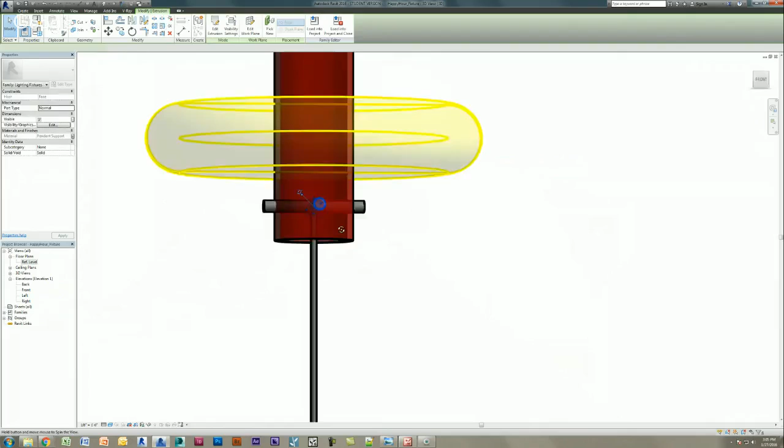It's actually a pretty basic light fixture, but it's also pretty custom. You can see it's got this sort of lampshade. It's got these two supports here. It's a pendant light fixture. It's face-based, and it's fully parametric.

If I go in a project, and I go underneath this little thing, you can see here it is. Here's our light fixture. What we're going to do is we're going to build it completely from scratch, and then we're going to do a quick rendering while we chit-chat on Google Hangouts.

And again, this is fully parametric, so if I went in here, I could change all these settings. This project happens to be in meters, which is going to drive my mind crazy, even though I like meters. But you can see all of these things will change. So if we want to change the thickness from 0.01 to 0.02, click Apply. You can see it got thicker.

If we want to change the pendant length, I think I might have made that an instance parameter right there, pendant length. If I go to 1.5 and click Apply, you can see it gets deeper. So once you take the time to model this, which doesn't take as long as you might think, you can actually use it in all kinds of different locations, etc.

Then we just check the questions real quick. I want to make sure I'm not missing anything. Looks good. Wow, that's trippy, huh? When that thing opens and just keeps going. Look at that. It's pretty cool.

Okay, so we are going to start from scratch. This is the family, and you'll notice there's this funky piece behind it, which is just an extrusion. It's a face-based family. And so you might be thinking, why would I not use a ceiling-based family? Well, one of the main reasons I don't like to use ceiling-based families, especially when it comes to light fixtures, is when you're linking projects. Sometimes, if not all the time, it doesn't see the ceiling and it doesn't work the way you want. So when you have a face-based family, you have a lot more options as far as placing the family.

So how do you make a light fixture with a face-based family? Well, if I go to File, New, Family, and I go down to Light Fixtures, you'll notice there's only wall-based, ceiling-based, or just a light fixture. That kind of sucks, right? Well, all you got to do is start with a generic model face-based. So I just started with a generic model face-based. Let me go in 3D so you can see it. I have to go shaded, especially with light fixtures.

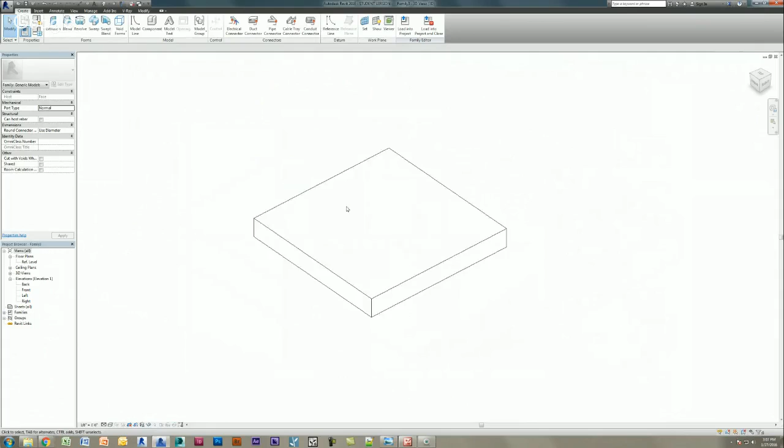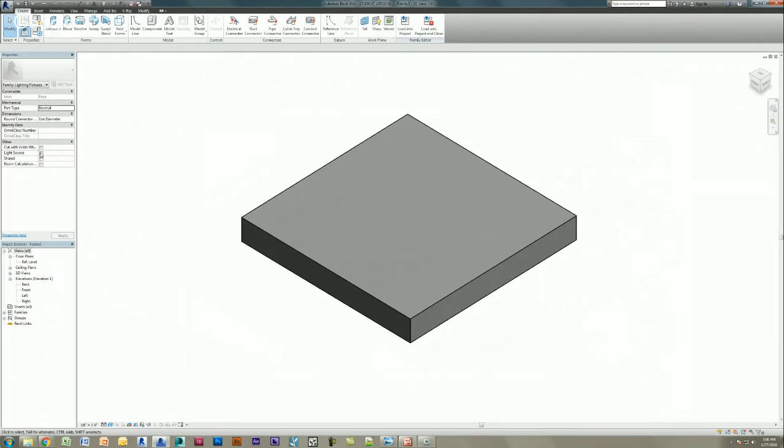We have our generic model face-based, and all you have to do is change the category. So if I go up on the top left where it says categories, I can change this to light fixtures. What it's going to do is it's actually going to give you a couple more options as far as connectors and line types, but it also gives this nice little checkbox here for light source. So if I check that off and click apply, now we have a face-based family that has your light source, right? And that's all you need for a light fixture is a light source.

So let me save this before I forget. Happy hour, final light. You can see I did it before just to make sure. Save. Okay, so there we go. Pretty simple, right?

Let me just check the questions. Very cool. All right. I wish there was like a notification or something. That's all right.

So first thing we want to do is we're going to do most of this in the elevation view. And the reason being is I'm going to actually use a bunch of revolves. Now, there's other ways you could do it. And as I'm doing it, you might be saying, oh, well, I could use an extrusion instead of revolve here. It's possible, but I'm going to sort of show you why I think the revolve is a good tool here. So we're going to go into our front elevation. But before we do that, we want to change this. This is a linear light source, right?

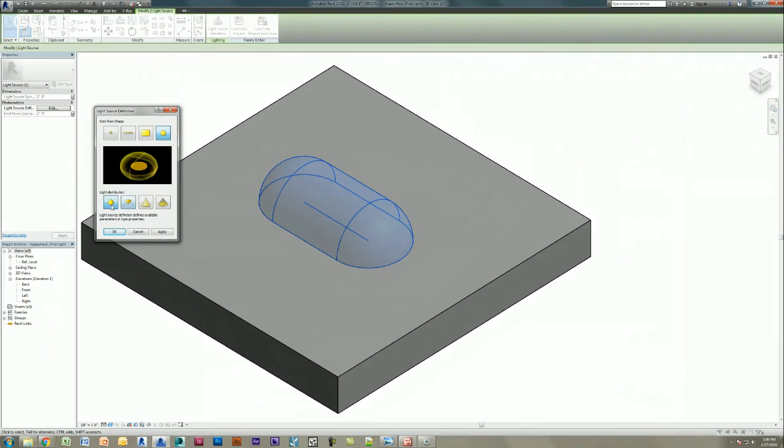And if you saw from that fixture before, if I go back into our final fixture, you can see it's not linear, right? That's not a linear light source. It's round. So we're just going to change the shape of our light source right off the bat so we don't forget. I'm going to select my light source. I'm going to say light source definition, and I'm going to go with round or circle. And then I also want it to be a sphere. I guess you could go down if you want, but this is kind of a neat light because it can shine up and down a little bit if you'd like. And click apply. And there we go.

It's pretty big right now. We're going to change the size of it later. And now we're going to go to our front elevation. We're going to work in our front elevation quite a bit in this family. So I'm going to type SD on my keyboard so we have a nice shaded view.

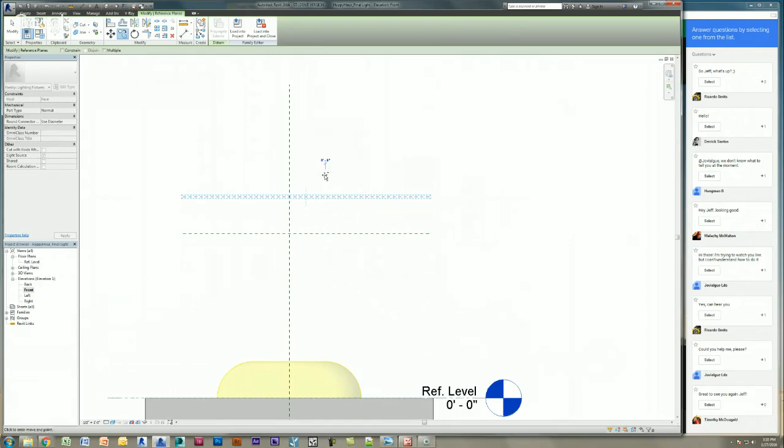Now we're going to draw a few more reference planes. We want to draw the actual depth of our pendant. And we also want to draw a centerpiece where that light fixture is going to go. So I'm just going to copy this up. I'm going to type 1 foot, and I'm going to copy it again, and I'm going to type 1 foot. For now, we can change that at any time. So now we have 3 reference planes, and we've got our light source down here.

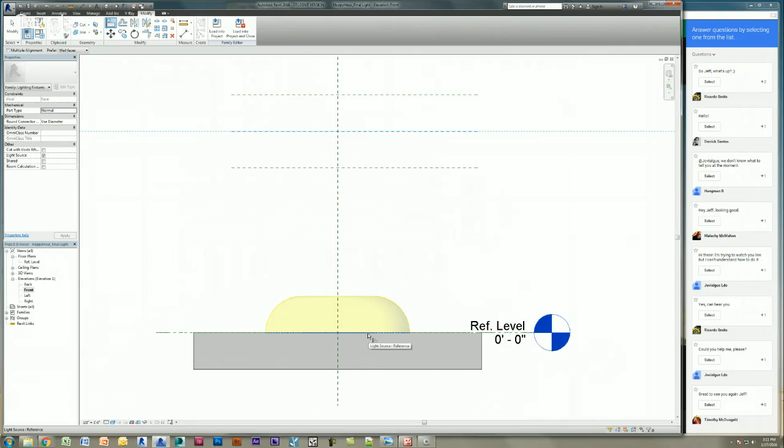So the first thing I want to do is I want to move this light source up to there and get it out of the way. So I'm going to type AL on my keyboard, my reference plane, and then I'm going to go down here, and I'm going to tab until I hit the light source. So there it goes. It says light source reference. So I'm going to click that, and I'm going to lock it. So now it's locked to this reference plane. So wherever this reference plane goes, that light source moves.

Great. So now we're just going to apply a couple parameters to this before we start getting anything detailed. So I'm going to type DI on my keyboard. I'm actually going to tab, and I'm going to dimension the reference plane down here. So there we go. I'm going to dimension the reference plane, and then I'm going to dimension this first reference plane, which is the top of our pendant. We're also working upside down. If I go back here, it might be a little confusing.

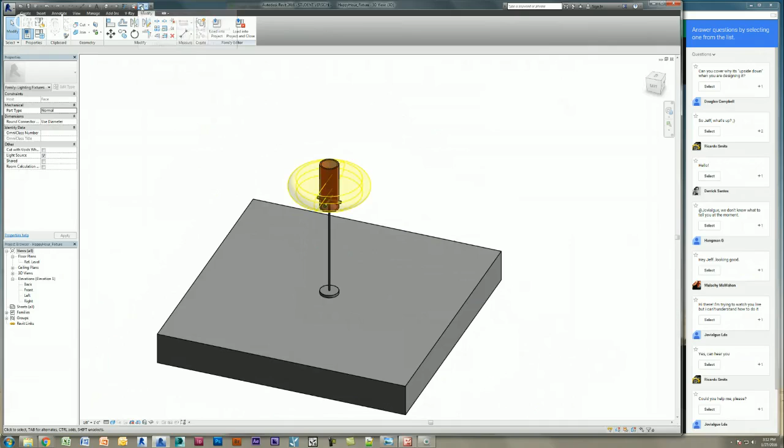Oh, look at that. And Doug just asked. Thanks, Doug. So the reason I'm working upside down is because it's face-based, and that's just how the template's set up. I guess you could reverse it if you want, but it takes a little bit of a mind jump to realize that. But if I go into the final one, you'll see what I mean. Let me go to the final one. So the face base starts with an extrusion that represents your face. So when you bring it into a project, it can technically be any direction.

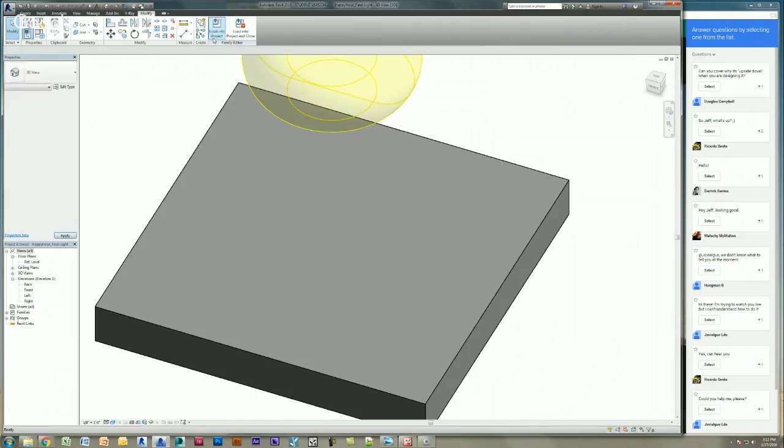So if I went in here and I said architecture component, here's that family I created. If you can see, it's actually looking all over the place, and it's turning left and right and up and down. So it really doesn't have a top or bottom or up and down. And so the default template has your face on the bottom. So you got to kind of do it in reverse. So again, if I went to the original one, you'd see. I should have named these something different, huh?

There we go. So if I went here, you could see. So now we're upside down. But you get the idea. Once you understand that, it's not that difficult to build it the same way. Again, it's just because this now can go in really any direction, which is pretty cool, right? So let's go back here. And there we go. We've got our upside down light. Okay. So I'm going to add a parameter to this. So I just selected the dimension, click add parameter, and I'm going to name this pendant length.

And I'm going to keep it a type parameter. I think I made it an instance parameter before, because you may want to push and pull it sometimes in elevation, but we're going to make it all types for now for this particular parameter. Now I also want to click dimension, DI on my keyboard. I'm going to select these two reference planes, and I'm also going to select these two reference planes. So I hit a string of dimensions between these three, and then I'm going to do an overall dimension.

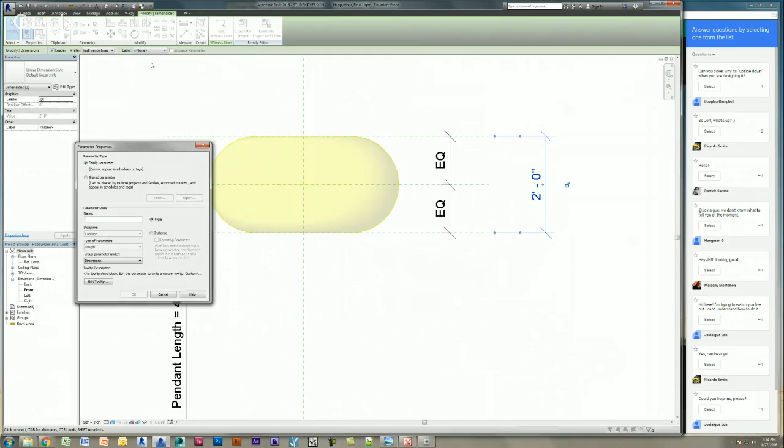So what that's going to do is if I select this string and click EQ, it's going to keep my light source in the center of whatever depth this is. So if I select the 2 feet dimension, click add parameter, and I call it fixture height. Now, whatever I do with this fixture height, so if I take this and I pull it up, you'll see this light fixture or light source actually stays centered. So that's why we EQ it. So now no matter what you do with this, it's going to stay centered.

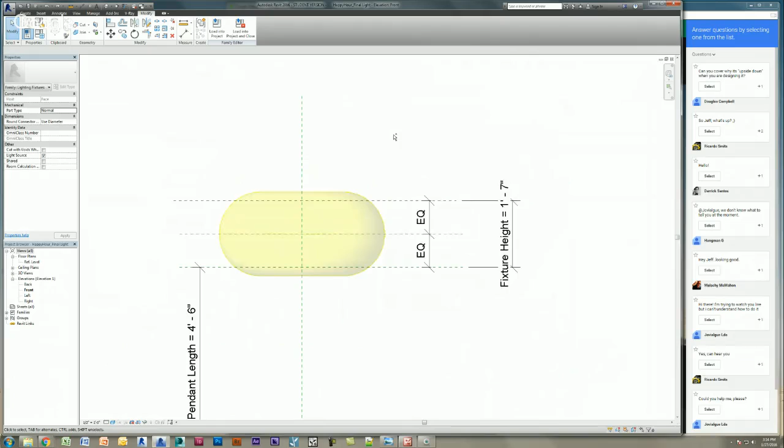I'm going to do this back to 2 feet. Okay. So there we go. I'm going to save that before it explodes. Now there's a couple more reference planes that we're going to put, and they might not make sense until we draw geometry. So I'm going to take this bottom reference plane. I'm going to tab to it. I'm going to copy it up. I'm just going to go 3 inches. It's kind of arbitrary right now, but what that's going to be is those supports.

I'm also going to dimension that. I'm going to add a parameter, and I'm going to call them shade supports. I guess we could say shade support location or something, but that's okay. So the shade support. So now whatever this does, you can see the shade support is actually moving with it. We don't want that, right? We want that shade support to stay at the 3 inches. So I'm going to make sure I lock it.

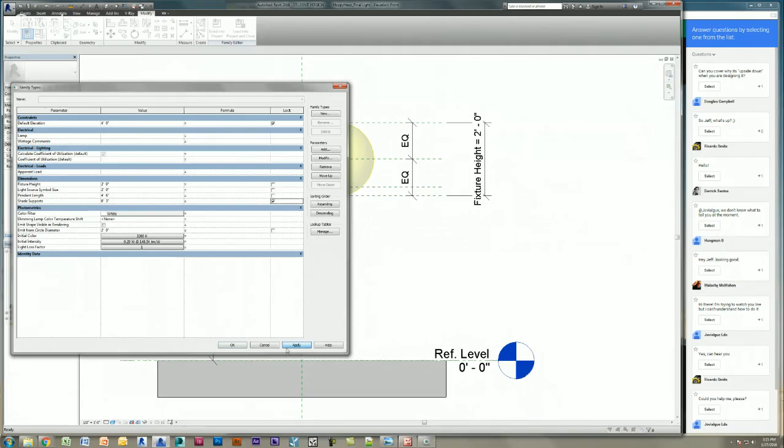So if I go to my family types, and this is why you flex families. I mean, no matter what, when you're building them, always keep flexing your families. So shade supports, I'm going to click lock there. And I'm also going to do it for fixture height, just for right now. And so now if I take this reference plane, I push and pull it, you're going to see everything's moving along with it. So this is why you want to flex.

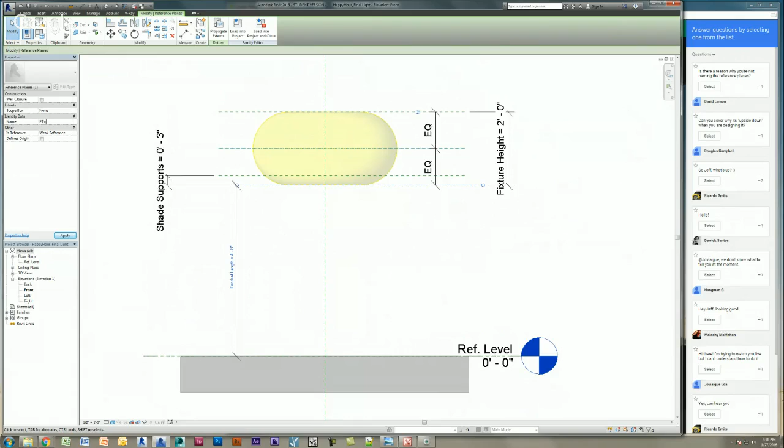David Larson asks, is there a reason why I'm not naming reference planes? That's a great question, and it's because I'm lazy. You can name reference planes all you want. So you can select this, and right under here say name, and you can say pendant, top of pendant, or something like that. Honestly, when you build a bazillion of these and you start using so many reference planes, it can get very time consuming to do it. I know a lot of people say it's a best practice to do it.

So I guess you can name them if you'd like. So that's as simple as it is. You just select your reference planes and you name them as you go along. Unless you want to sit here and watch me name all these, I'm not going to, but that's a very good point. And then Steve Hickerson asked, are these all instances or types? I'm using all instances here. I'm using all types here.

This is a type of family where I think you would want to have 8-inch diameter and be able to control all of that as a type parameter. I don't think there's going to be enough variation in this to not. I'd say the only parameter I would make an instance if you wanted to would be this pendant length. And the reason being, if you're on, let's say, a sloped roof or something, you might have the exact same fixture that's going to have multiple lengths, right? Because it wants to be even or something like that.

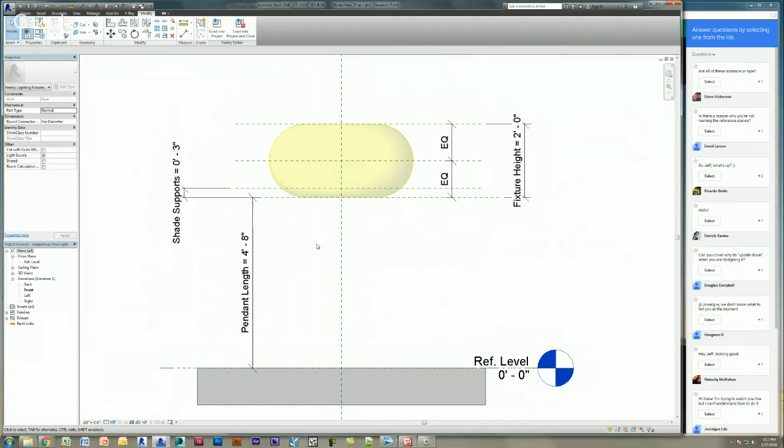So right now, these are all instances. Sorry, these are all types. I guess I'll make this an instance just for the point I just made. So pendant length, I'll modify it, and I'll make it an instance. And again, the reason being, if you place it on something on an angle, and maybe we'll do it at the end, you can make the bottom of it all the same.

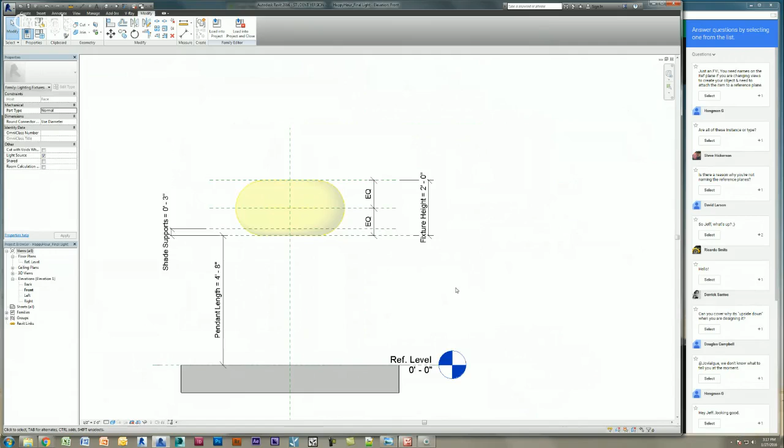Okay, so Hangman makes a good point as to naming reference planes. He's saying that when you're locking stuff and you need to attach to reference planes, it's nice to name them, because when you're in different views you'll see the name and you know you're locking to the right one. So that's a good point. None of these reference planes are going to be overlapping that much to where I'm going to get confused or you'll get confused. So I'm still kind of doing it for the sake of time.

Okay, great. So now we're going to set up a few more reference planes. And this is where people might scream and say, why are you doing it this way? But I actually kind of like doing it this way. I'm going to use a revolve instead of an extrusion for this, and I'll explain why. So first, we're going to draw a couple reference planes vertically. I'm going to draw a reference plane here, select it, and say 3 inches.

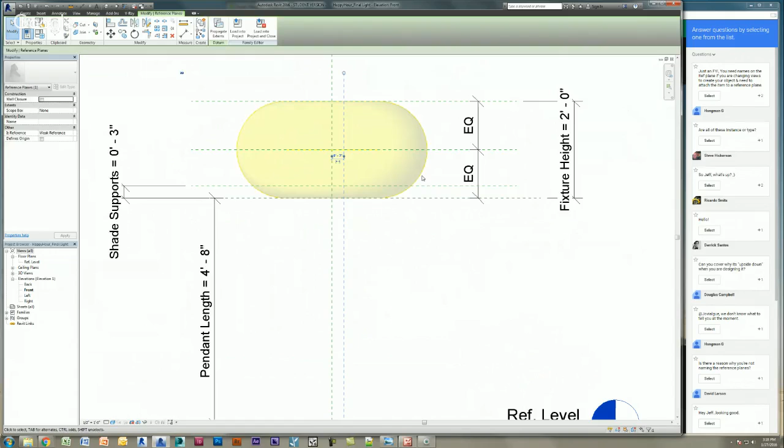And I'm going to draw another reference plane. I guess I could just copy this one. We'll copy this one. I'm going to go out 1/2 of an inch. Okay. So we're starting to set the skeleton for this pendant here. And we're going to draw one more. We'll do that in plan. So we'll just do this pendant first. So we got these 2 reference planes here.

And so now I'm going to dimension these. I'm just going to do it down here so it's out of the way. And I'm going to make 2 separate dimensions because these are going to be 2 separate parameters. If you did a string, you wouldn't be able to do the 2 separate parameters. So if I select this 3-inch dimension and say add parameter, I'm going to call this one shade radius. Type. And I'm going to select my 1/2 inch. Because these are 2 separate dimensions, we don't want to do a string. That's why I drew 2 dimensions.

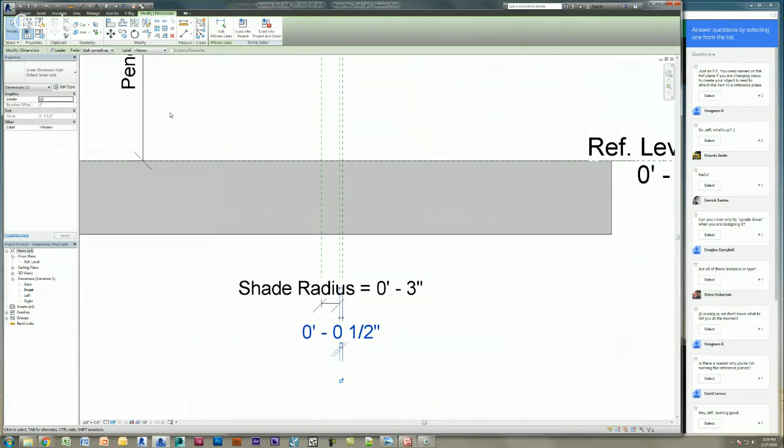And before I do that, I'm going to type UN on my keyboard, and get rid of those damn trailing zeros. There we go. Wonderful. Okay. So let me select the 1/2 inch again, go to add parameter, say type, and then we're going to say shade thickness.

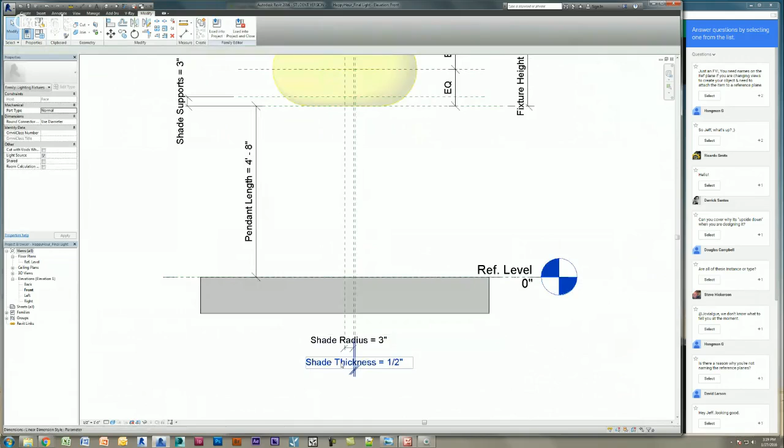Okay. So the reason I'm using a revolve here instead of an extrusion is we can control these with typical regular dimensions. If we were to do it as an extrusion in floor plan, and maybe I'll do it both ways real quick, you would have to use a radius dimension here, and then a radius here, and if you want to be able to type 1/2 inch, you'd have to do a formula or something to make it work. So here it's pretty simple. It's 1/2 inch, 3 inch, and it's going to work the exact same. There's plenty of ways to skin a cat in Revit.

So I'm actually going to create my first piece of geometry now. So I'm going to say create, and do a revolve. And I'm going to first draw my axis line. With my axis line, I'm going to pick lines, and select lock here, because I want this to always stay locked to this center reference plane. And then I just pick the center reference plane.

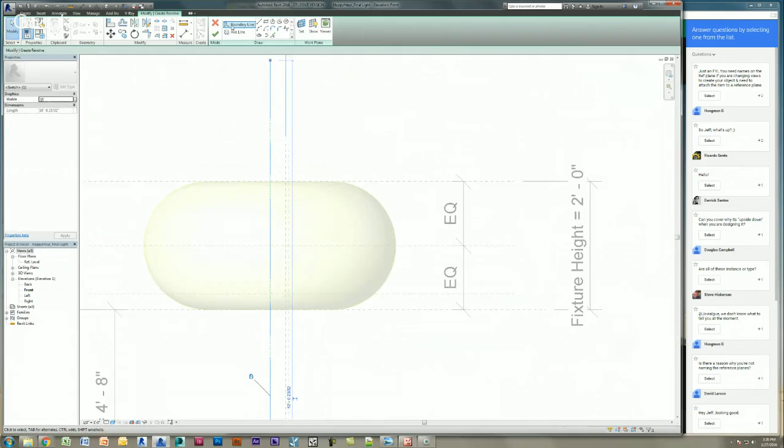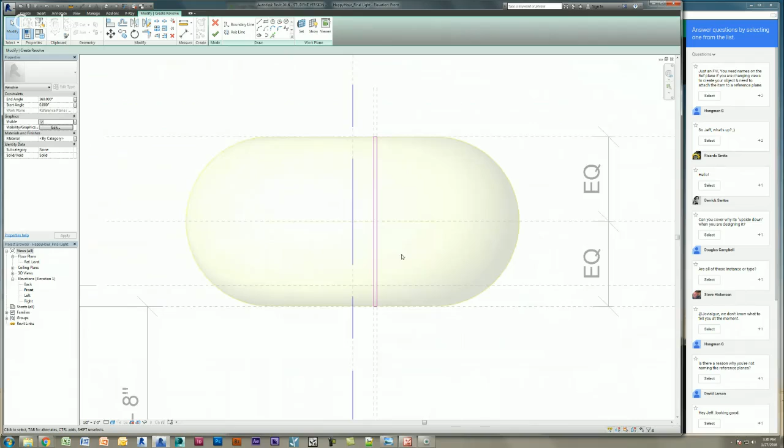And now I'm going to select boundary lines. I'm going to use a rectangle to save some time. And when I draw my rectangle between these reference planes, I'm just going to lock them up. The reason I use a rectangle is because the locks pop up. If I was to draw lines, the locks don't always automatically pop up where you want them to be, right? So you'd have to do it in between and you break your chain. But there we go. So this is actually going to be our shade. We're revolving it around this center line.

So if I click finish, you can see in 3D here, we have a revolve. And because we set up those reference planes already, if I go back to my front view, we set up these reference planes and these dimensions. If I was to push and pull this, so if I said my shade radius was 4 inches, apply, you can see it bumps out to 4 inches. And we can go back down to 3 inches, it bumps to 3 inches. So again, we could have done an extrusion.

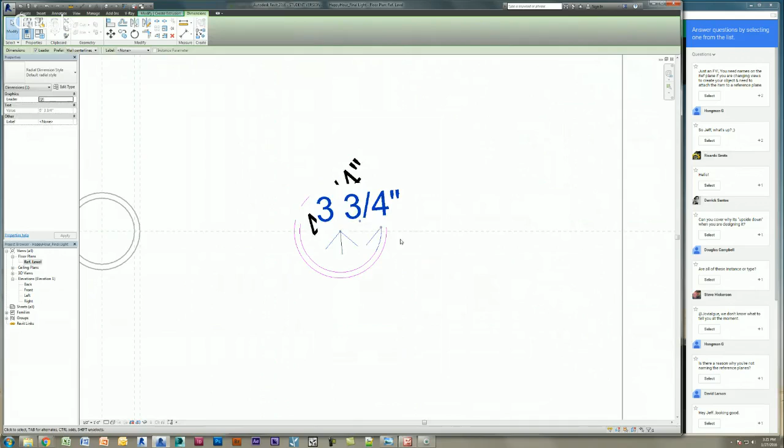So if I go into my reference level, if you did an extrusion, I'll just quickly draw one, you would have to draw 2 circles, let's say, and do 1/2 inch. And then here we dimension a radius to the outside and to the inside. And then one of these would control. So let's say this was shade radius. Now this one, if we said 1/2 inch, shade thickness, obviously it wouldn't work, right? It would have to be shade radius minus shade thickness, and then it would have to be controlled by another one. Excuse me.

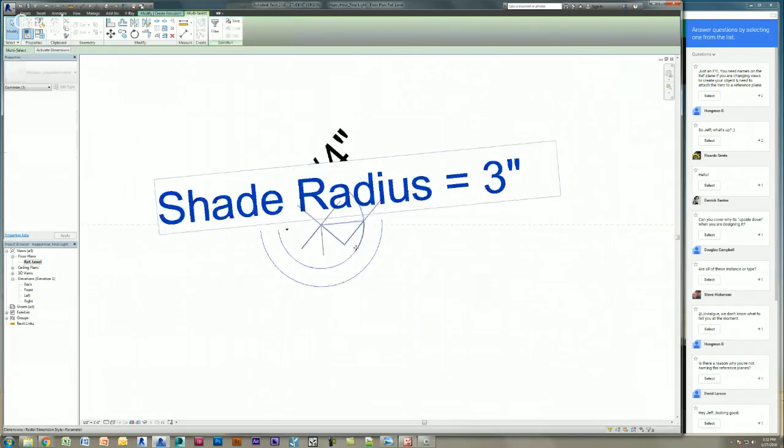So that's the reason why I decided to do an extrusion here, because now we're not using any radial dimensions. I always like to avoid radial dimensions as much as possible. That's just me. You can feel free to use them all you want. Okay, so there we go.

We've got that. Now what we want to do is we need a reference plane for our cable. I feel like we should use the same reference planes for our support. I think maybe you'd want them to be separate. You want the support to stay the same while the shade bumps out. I think it would make sense if this went to like 7 inches or 8 inches in radius. Maybe the support wants to go to 7 or 8 inches in radius. So I'm going to use the same one for now, which is fine.

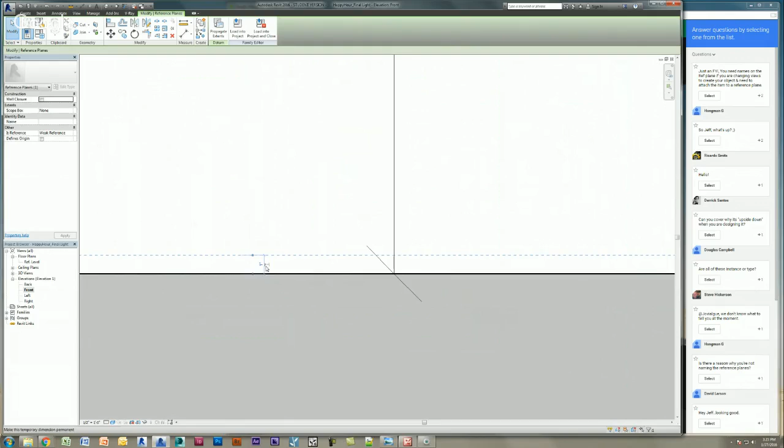And if we want, we can use a revolve real quick to create that. So I'm going to draw a reference plane, and I'm going to set this dimension to, no, let's do 1 inch. Let's do 1 inch there. Okay. Now, instead of dimensioning it, I could bring out this temporary dimension. If you select the little teeny dimension you might be able to see there, it'll turn it into a real one. And then we can convert that, or use DI on the keyboard, or dimension it by hand. I just wanted to show you that little tip.

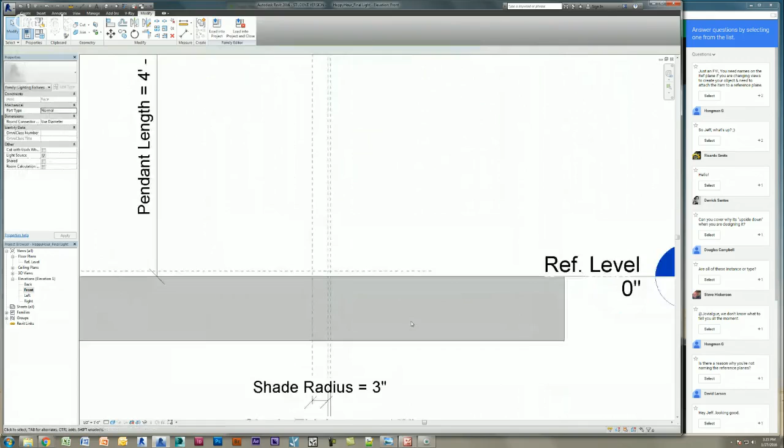So I'm going to select this and say add parameter. Again, I'm going to use a type parameter, and I'm going to say support depth. Yeah, there we go, support depth. Now I'm going to use revolve again, just because I'm in the mood to use revolves. I'm going to say axis line, select the middle, same as I did before, make sure the lock is checked on the axis command. Lock it up there. Then I'm going to select boundary line, rectangle, and do the exact same thing. So pop it from here to here.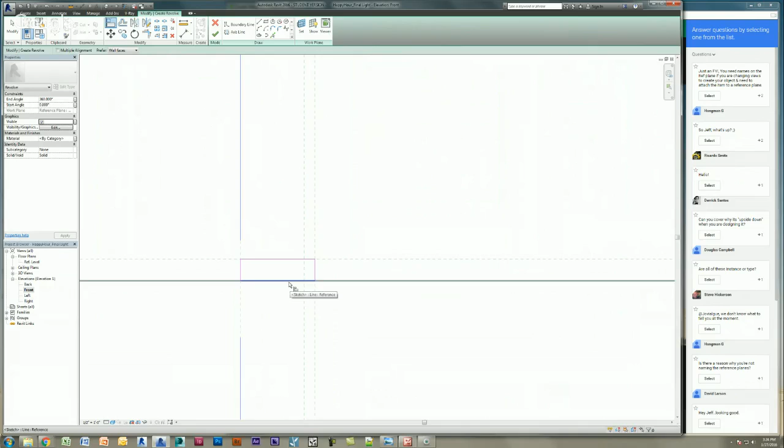The only thing I would worry about here is it might automatically be selecting the reference plane or the face. So I'm not going to use that lock. I'm going to select these three, use align on the keyboard, and tab around. And this is what that comment was before, I forgot who made it. If you tab to a reference plane that's named, it'll tell you right here which reference plane you're tabbing to. This is unnamed, obviously, but I know it's a reference plane. It's the only one there, so I'm going to select it. Then I'm going to select my sketch and lock it. So there I'm actually locking to the reference plane. Then I'm going to click Finish.

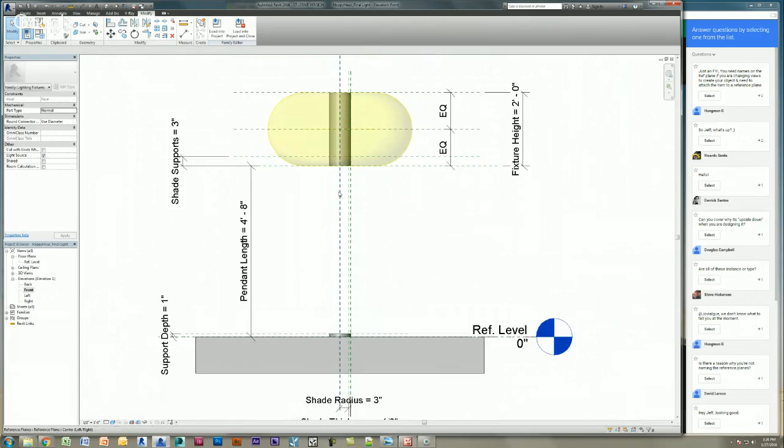Now we have our support. And again, it's controlled by this shade radius. So if I zoom out, there you go, you've got your support there. I guess here we could have done an extrusion just to the shade radius because there's no offset, but again, I'm in the mood for revolves, apparently. So now we're going to draw a reference plane that's going to represent our thickness, our cable. I just drew a reference plane there. The cable wants to be 1/2 inch total, so it's going to be a 1/4 inch radius. I'm going to do the same thing here.

You know what? Because I did so many revolves, let's do an extrusion for fun. So I'm going to delete that. We're going to go back to the floor plan and do an extrusion. I'm going to go to Create Extrusion. I'm not even going to bother with the reference plane because I'm going to keep it centered. So we're going to use a circle, keep it right in the middle, and go out 1/4 inch. So there we go. We've got our 1/4 inch.

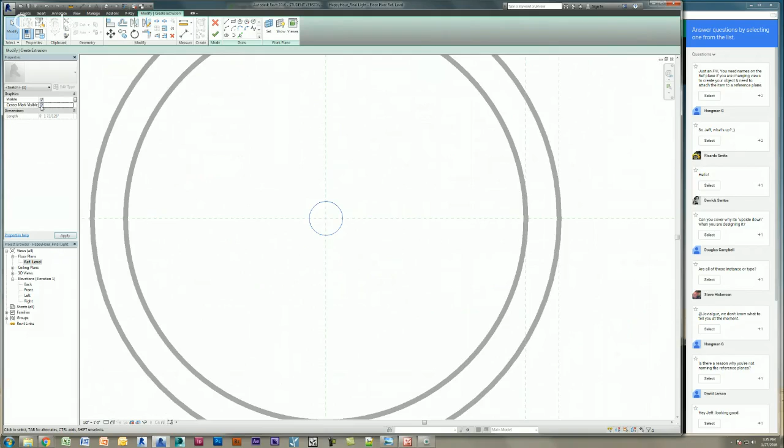Now, usually the automatic sketch dimensions will keep this circle locked to the center here, but I always like to make sure. In order to do that, I select my circle, check the little box here that says Center Mark Visible, and click Apply. What that does is it gives you that X, which you probably haven't seen very often.

And now you can actually align. So if I type AL on my keyboard, I can align to this reference plane and lock it. I can select this reference plane and lock it. And now you know that thing is not going anywhere.

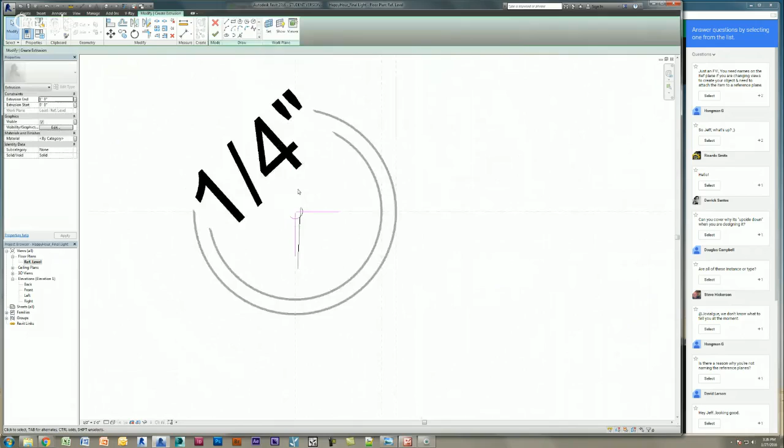Now, last thing we're going to do is we're going to put a radius dimension in here. So here we go. I got a radius dimension of 1/4 inch. And I'm going to select that dimension and give it a parameter. We're going to say cable thickness, or maybe we'll say cable radius so we know it's a radius. There we go, and click Finish.

Now I'll go back to my front view, and I'm just going to pull this cable, and I'm going to pull it up to where the supports are because that's where it's going to support it, and lock it. And I'm also going to pull it back to this reference plane, and I'm going to lock it to that reference plane. So by taking those pulls and moving them around, it allows you to lock to specific elements, which is pretty neat.

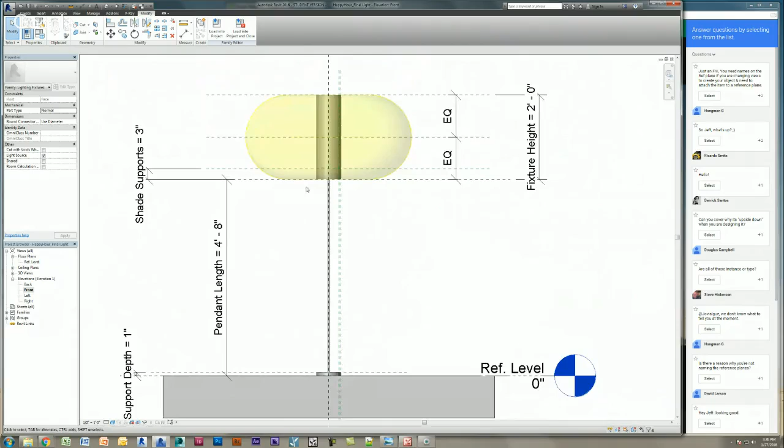So now you can see we're starting to get a light fixture going here. So we pretty much got it there except for the supports and some materials, right? And there's a couple little things that we're going to tweak later. So now we want to go and we want to make those supports, which is just a simple little X, right? They're a cross right in the middle here.

So I'm going to set up some reference planes in floor plan because they're actually going to extend past our pendant a little bit. So if I go into my reference level, which is the floor plan, I'm going to set up a couple things here. Let me type RP on my keyboard for reference plane. Or you know what? I want to go 1.5 inches outside.

So I'm going to start with this one. I'm going to select this reference plane. I'm going to copy it 1.5 inches. Okay. Then I'm going to select it. I'm going to type MM on my keyboard. I'm going to mirror it around.

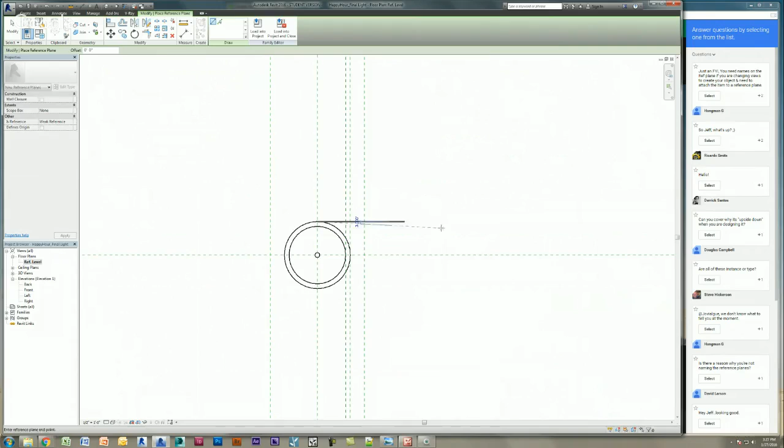I'm going to do the same thing here. I'm just going to draw a reference plane. So we'll extend that up. I'm going to move it up 1.5 inches so I know it's the same as the other one. Then I'm going to type MM on my keyboard, and I'm going to mirror it around. So now we've got this box that we created here. Let me just double check to make sure this question stuff is still good to go. Okay.

So now we have this box here. So now we want this box to obviously be centered within our fixture. So we're going to dimension and make those EQs that we showed before. We're going to constrain it equal. So there we go. I'm going to EQ that. I'm going to EQ this.

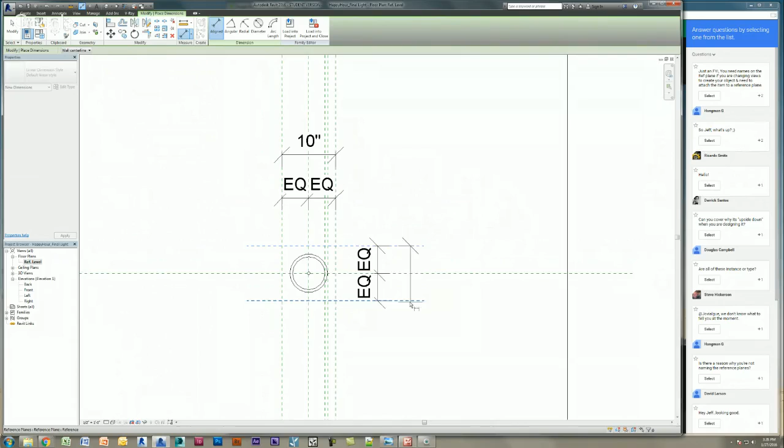Now I'm going to use a dimension for the overall. And we're actually going to drive this dimension with a formula. You don't have to. There's other ways we could have done this. You know, we could just lock it to some other things here. But I think it's going to be a lot easier because we use that revolve technique to use a formula. And then you don't have to think about it later. And I also want to talk about some formulas here, so it's a good opportunity.

So I'm going to select this 10-inch dimension. I'm going to click Add Parameters. And I'm going to call this Shade Support Length. I guess it's kind of long, but let's keep it like that, only because I did it in the example and I don't want to confuse myself. So there we go, Shade Support Length. Okay, so now we have to draw our shade supports, and then we have to set up some math.

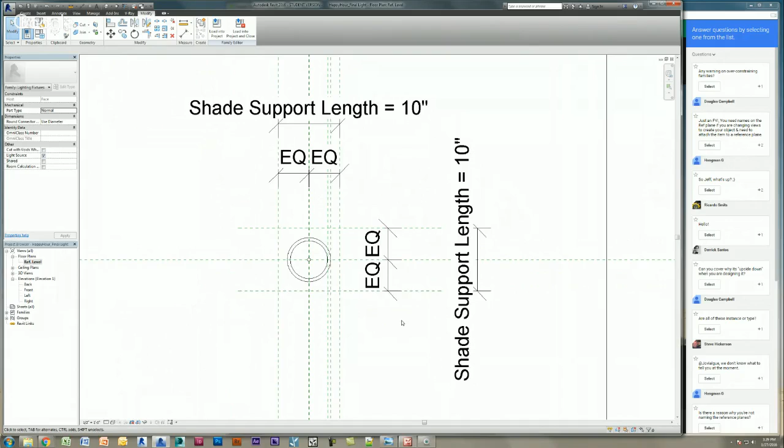So, for instance, if I was to dimension these two on this side and not even realize it, and then try and lock it, look what happens. Yeah, that's right. I forced that error. So that seems to be the typical, and you don't even realize you're doing it, is when you double constrain something. You know, the same will happen in this direction.

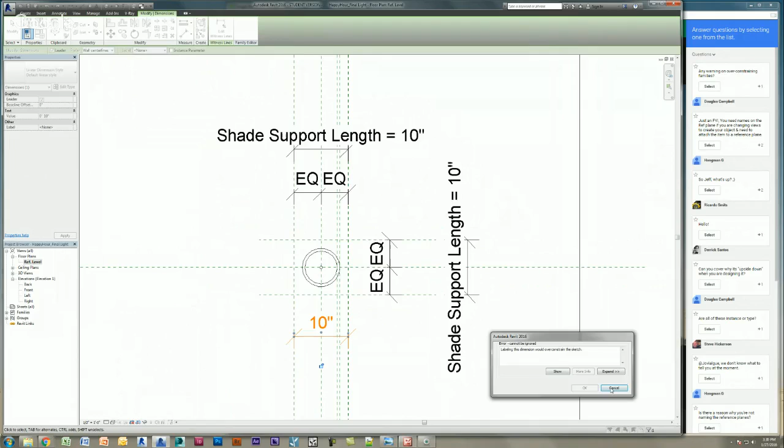If you hit here and here, and you selected and went to, I don't know, shade support length, the same one. See, it's yelling at me. So more often than not, with me at least, and I bet it's the same with you guys, you're over dimensioning something that you don't even realize you're over dimensioning.

Obviously, when you get more complex, there might be some other reasons, but I hope that was somewhat of an answer for you, Doug. I mean, the fact that I just created it for you shows that it's definitely a common occurrence. So that's actually probably the most common error you're going to get. And I think that for me, it's usually over constraining by simply dimensioning the same thing multiple times.

So let's just draw these supports real quick. So I'm not going to use revolves. I'm going to actually use extrusions. I'm going to go to Create Extrusion. I'm going to use a circle. And we already had this reference plane set up here for shade supports, so I'm going to use that. And I'm going to go, I don't know, do we go 1/2 inch? Yeah, it doesn't look too bad. I'm going to go 1/2 inch radius.

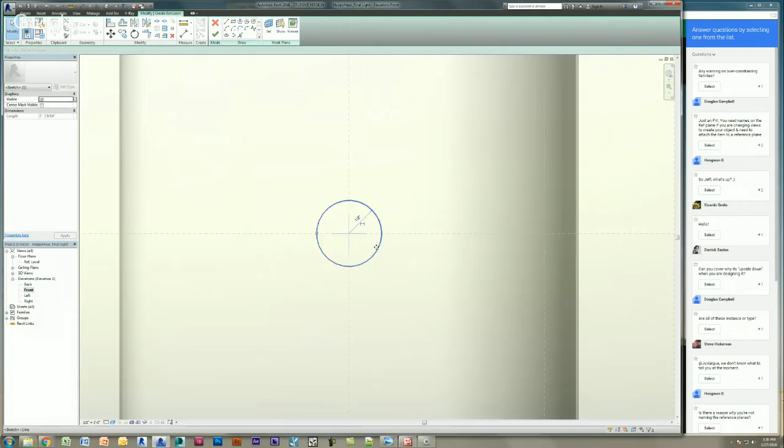And now here, if we want, we can do the same thing. We can hit center, make center visible, and we can align it. Same thing with the center. I'm going to tab to hit this reference plane. I'm going to align it. And we know that that's centered there. I'm going to click Finish. I'm going to go to my floor plan. And I'm going to pull this and lock it to what we just created. Pull and lock, pull and lock.

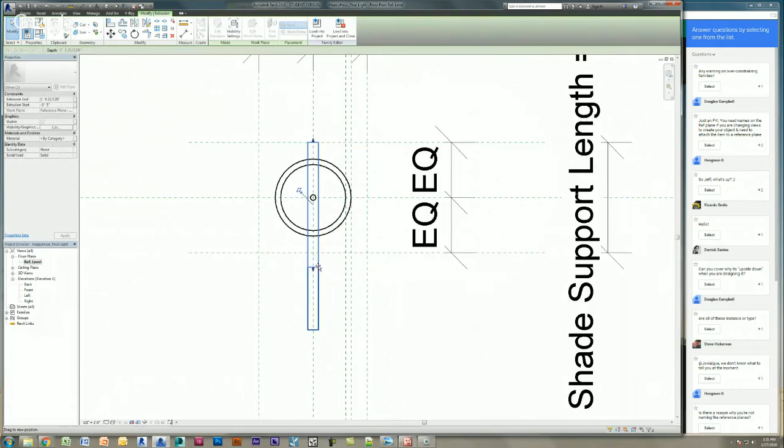Okay. And now going back to my high school geometry days, I know that if I mirror this, so I'm going to use DM on my keyboard, and I mirror this on a 45, it's going to pop it that way, which is pretty cool. And I'll just reselect it there. What I'm doing is I'm just pulling these little blue grips, and I'm going to hit the reference plane again so I know that it's locked around the horn.

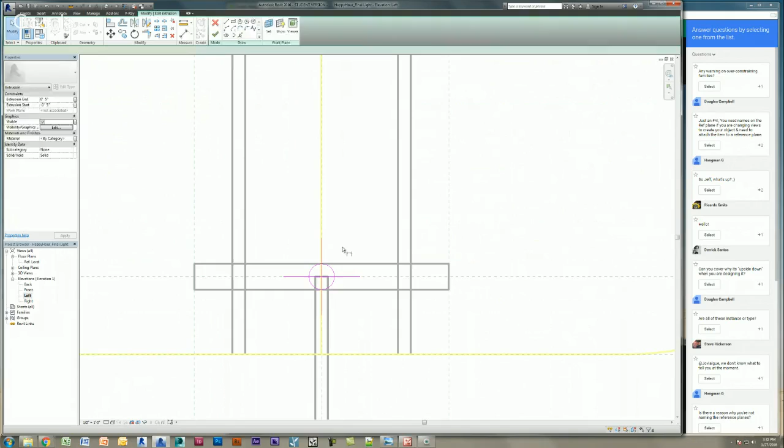Good. And I'll double check to make sure this should have stayed constrained, but if I go to my left view, I want to double check to make sure this guy is constrained in the middle. So I go to Edit Extrusion and see if I pull it, it's not. I also forgot to set a dimension for that radius. So let me just make sure I hit the reference plane, align the middle. I'm going to type DI on my keyboard. I'm going to use the radius. And I'm going to give this a new parameter called support radius.

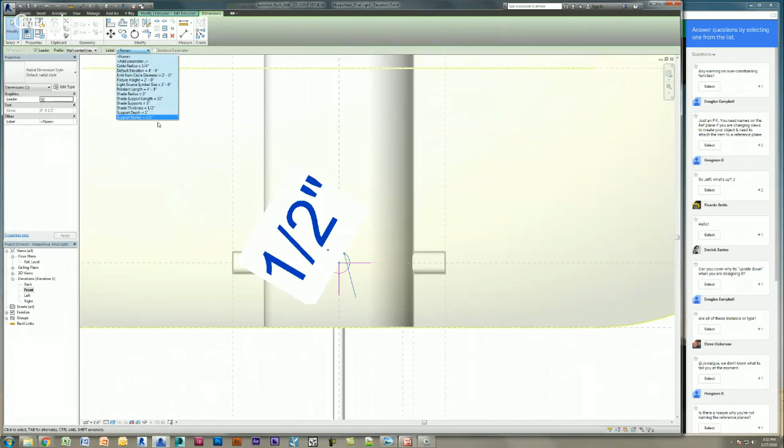Now we have to make sure we give the front one the radius. If we did that before we mirrored it, it actually would have stayed, which would have been nice. But I forgot to put that in there. So let's go to Edit Extrusion, DI on my keyboard, radial there, select it, and shade support radius. Where'd it go? Support radius. There we go. And finish.

Okay. So now we go in 3D. You can see we're starting to get a light. And it's actually got those supports under there, which is pretty cool. It's got a support here. It's fully parametric, although we haven't flexed in a while. So let's check some flexing before we throw in some math and formulas. So if I grab this and I pull it, you can see it looks like it's working nicely, which is good. So that's pulling up and down.

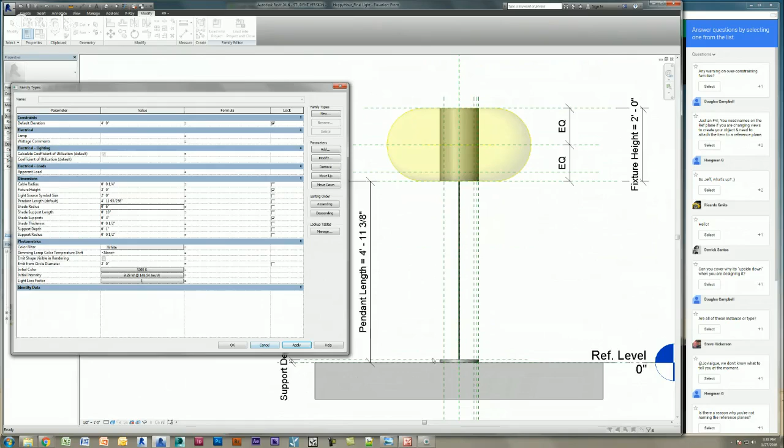Let's see if I pull the shade radius up to 6 inches. Well, sorry, the radius moved. You can see that bumped out, but the supports didn't move. So we have to set up that formula for the supports. But you can see the support work down here and the shade work. So now we just need to do this math. Let me undo this. We need to do the math to create the support lengths correctly, right? So what are the support lengths going to equal?

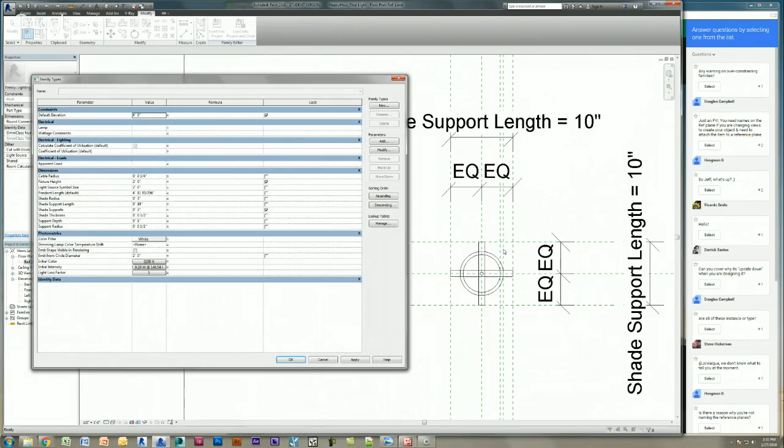So let me go into my formulas here, into my types, make some room. So the support lengths, we wanted 1.5 inches outside of the shade. So therefore, we're going to use a formula. Let me go shade support length. And we are going to say we want the fixture radius, right? That's going to be 3 inches plus the fixture thickness, or the shade thickness, I think I called it. And then we're going to multiply that by 2, which will give us something, right? That's going to give us, oops, did I name that wrong?

Shade radius. I named it something different. That's going to give us the right to the outside, right? Which is fine for now, but then we'll add the overhang. So shade radius. That's giving us 7 inches. So if I click apply, you can see it's nice and flush there.

So then what I want to do is I want to drive it. So if I add a new parameter and I say shade support overhang, again, that's a long one, but that's okay. Shade support overhang. And we say 1.5 inches. We're going to add it to this. So shade radius plus shade thickness plus shade support overhang

equals our 10 inches. And now if we change our shade support overhang to 2 inches, this bumps up to 11. So it might be a sort of long way to get to it. You can see it's flexing here and there, but it's a way where I can introduce some formulas to you, and also where you can use that revolve instead, but you can see it's working perfectly fine.

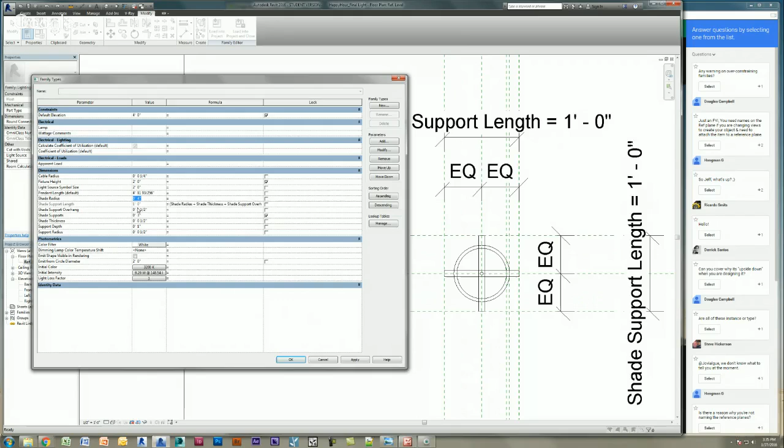So now when I change the shade radius to 4 inches, everything should bump up okay. See that? All bumped up perfectly fine. So kind of a cool way to introduce some formulas into your families. Now the last thing we want to add a formula for is this light source.

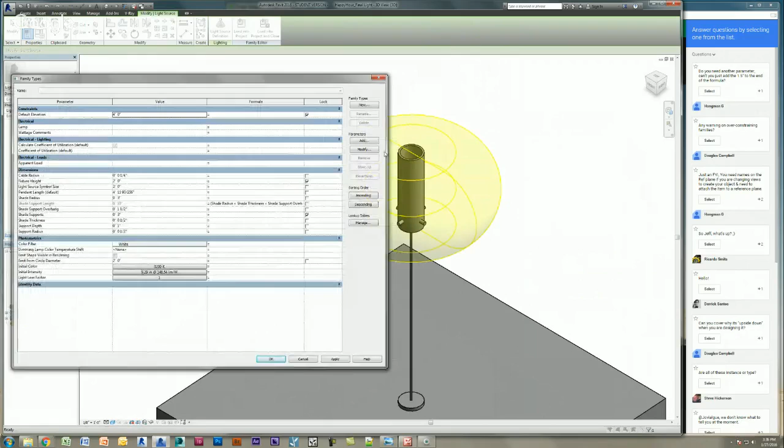So you notice the source is actually pretty big. The source symbol size is actually 2 feet. We actually want it to be the same as the radius, although I think this is a diameter. So let's go inside here, and I'll show you what I mean. Oops, there we go. So light source symbol size is 2 feet there. So I believe it's a diameter.

So we're going to have to say shade radius times 2 and click apply. And you can see it's going to make it 6 inches, and it'll always be the same thickness as our shade. So if we bump up our shade, the light source bumps up with it, which is always pretty neat. So now we've got fully functioning.

Let's double check a couple things here. This should move up and down. If I change my fixture height, let's change my fixture height. 6, click apply. There we go. That stayed center. Perfect. This shade support, let's check that. Shade supports 4 inches. Click apply. Perfect. So it's all flexing and pushing and pulling.

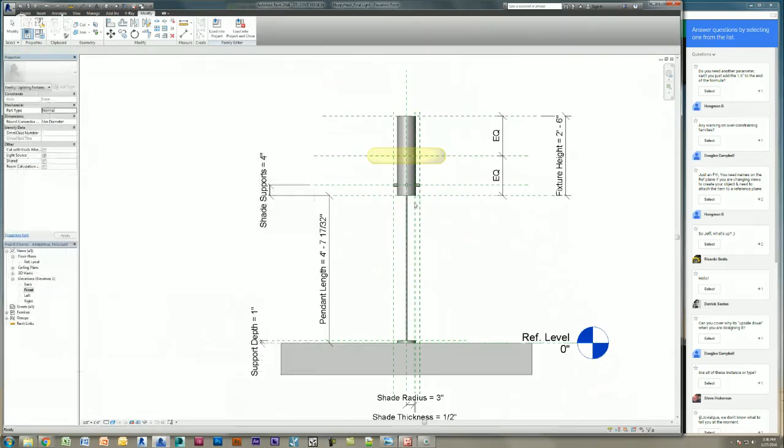The final thing, we got a question here. Do you need another parameter? Can't you just add 1.5 inches to the end of the formulas? Yes, Hangman, you can. The problem would be if you wanted to adjust that. So what Hangman's asking is, instead of doing a shade support overhang parameter, can't you just say shade radius plus shade thickness plus 1.5 inches times 2? And you most certainly can.

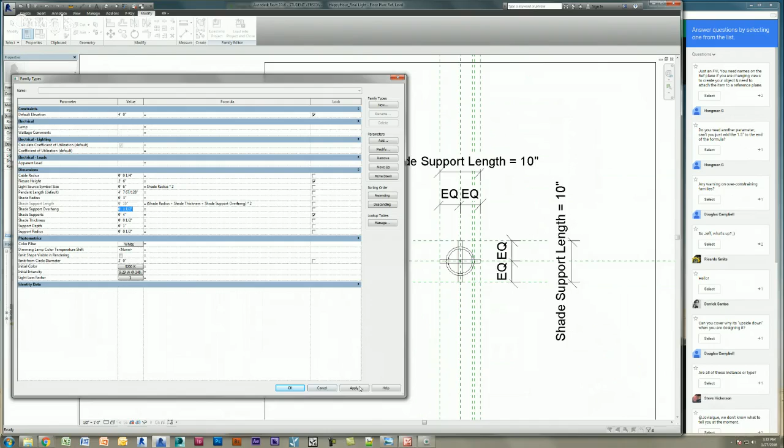But then to change it in the project environment, you can't. You'd have to go into the family, or you have to go into the formula to change that. So what I'm allowing you to do is change that in the project environment. So this will be given as an option, and I'll show you when I bring into the project environment. This will be grayed out. So I hope that helps. I think it did. Thanks for the question, Hangman.

So let's add a couple little materials to this thing, and I'll show you the little tweak that I usually use, and you might have seen the tutorial before for making this light look really cool rendered, and then we'll bring it in and we'll render it while I talk a little bit more about volume 3. So I'm going to create the supports and the cable and the actual surface support. I'm going to create those as the same material.

So I'm just going to select them right now. I'm selecting all of those together, and I'm going to give them a parameter. And I'm going to make it a type parameter. So I just selected the little browse over here and click add parameter. And we're going to say pendant steel or something like that. Support, I don't know, we can call it something, whatever.

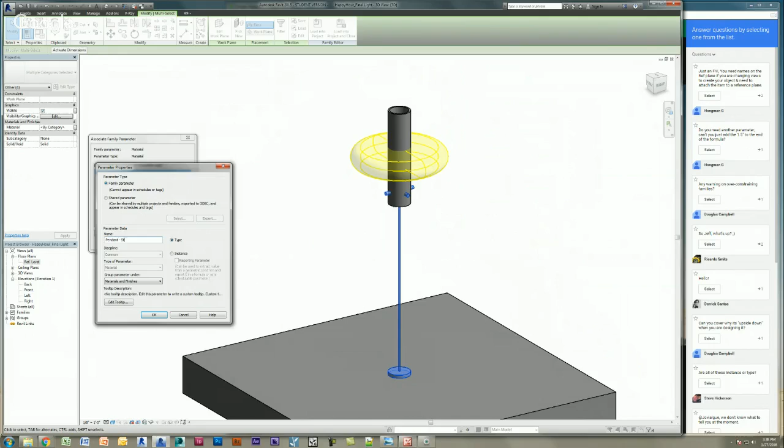Type, and click OK. And now I'm also going to give the shade a material parameter. So I'm going to click add. I'm going to say pendant shade type. Okay.

Now, there seems to be a little debate between a lot of Revit users as far as whether you set up materials in the project environment or you set up materials in the family environment. A lot of people will say you leave this as just a parameter and then you do it in the project. I'm kind of indifferent. I really don't care. There's benefits to each.

I'd say the one sort of downfall is that if you have something named the same, so if this is called stainless steel and you bring it into your project that has stainless steel, there's going to be an overwrite and you're going to have some issues, right? So if you want to have custom stuff, like you've probably seen Herman Miller and some of those companies, they have Herman Miller dash fabric, blah blah blah.

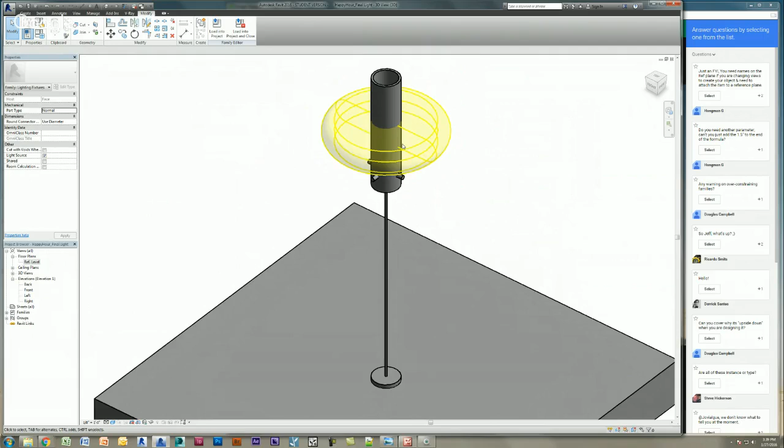Then that's your thing. I'm going to actually create them in the family and bring them in just because that's how I want to do it. You don't have to. Again, you're giving them the option to apply in the project. So I'm actually going to add them in here. And the reason I'm going to add them is because I'm going to paint a material to show the light being on. And I want to show that in here.

So I'm going to create a new material, so I know I'm not duplicating anything. I'm going to rename it pendant shade. Let's give it a little dark red and maybe a hint of transparency. And now in my appearance, I'm going to replace it with a default Autodesk asset. I'm going to search for glass, and there's like a dark red. Let's see. Yeah, there's a dark red. I'm going to start with that, and now I'm going to duplicate it.

You've probably seen the post where I said you've got to double duplicate your materials to not get headaches. Well, this is why. This is called dark red. So no matter what you call this, even though it's called pendant shade, if you loaded it into your project and you didn't change the name of this, whatever your project's dark red settings are will be applied. So by duplicating this, and renaming it, I can say pendant shade. Then you know that whatever you do in here is going to be okay in the project. Of course, until you reload it and you already have this material in the project.

So sheets of glass, I'm going to crank it up a little bit. Nah. I don't want to make it super clear. So I guess that's okay for now. We'll click apply. And so that's our pendant shade. Now we're going to do our pendant supports. And for this, I'm just going to use a default Revit asset. So I'm going to first create a material here. I'm going to say rename, and I'm going to call it pendant.

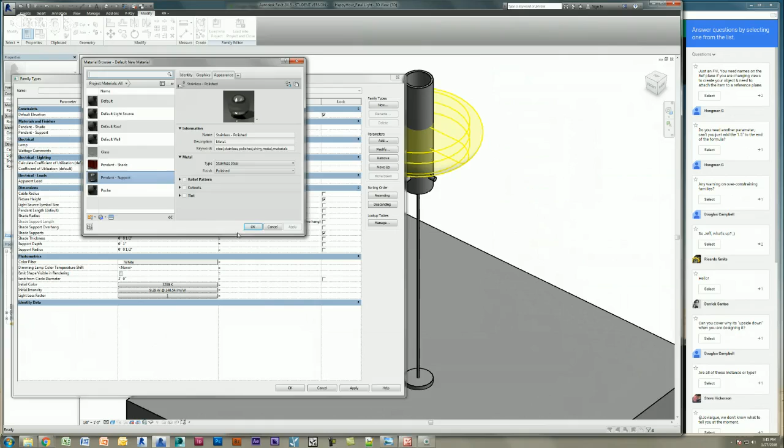So now you can see we got some nice materials applied there. First, I need to save it in case it crashes. The final thing we want to do is paint on a material to show the light being on. You've probably all run into this where you render something with a light fixture and it doesn't look like the light's on. Well, that's because it's not on as far as the material is concerned. You might be emitting light, but there's no light source.

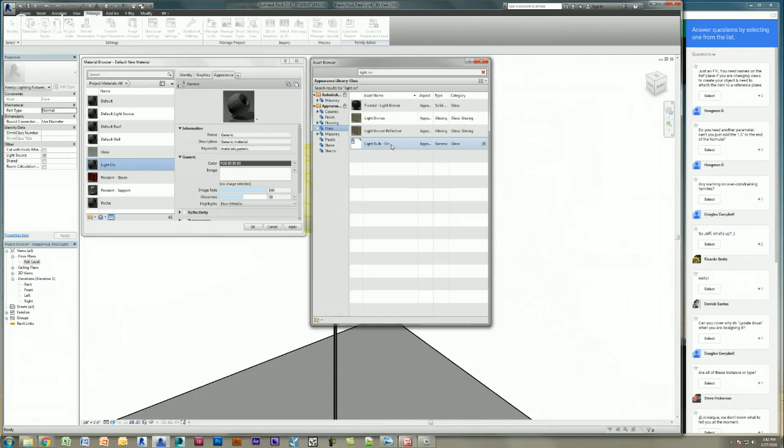So I'm going to go into Manage Materials. I'm going to create one more material and rename it. I'm going to call it Light On Pendant, or if you want, Light On Generic. I usually like to use that, and then I can use it for other things. I'm going to go under Appearance, and I'm going to replace. And if you search for Light On, and you go under Glass, there's a little default material called Light Bulb On. You're going to select that.

I'm going to leave it defaulted. We'll leave it clear for now. It's usually transparent. I'll actually turn off transparency a lot of times because you don't want to see through it. But for this case, we might want to see through it. So I just created the material, and what that allows me to do is under Modify, I can paint, and my material is not popping up here. Let's see.

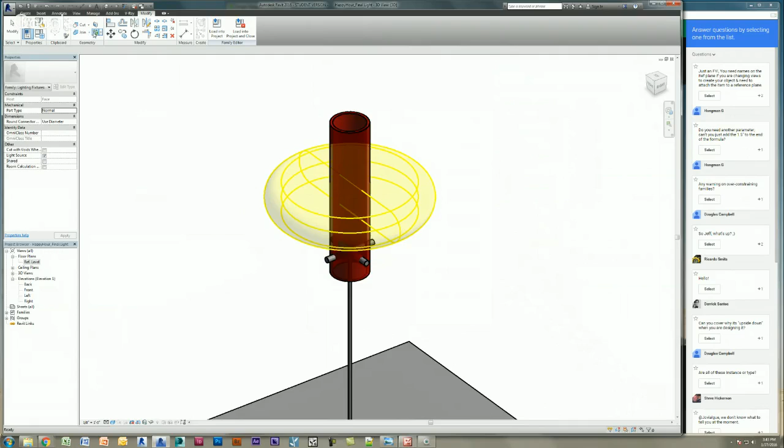Remove. Oh, it was set to remove paint. Let's go to actually paint. And there we go. Now the materials pop up. Again, that's under Modify, and Geometry, you can paint. I'm going to select that material I just made, and hopefully you can see it.

I'm going to select the inside of this cylinder. And notice how the inside of the cylinder is gray. That's because it has a different material than the outside. Let me save this, load it into my project, and place it sideways. Let's try that again. Here we go. Place it there.

So now we've got this light fixture here. And there's our light fixture in the project environment. I actually probably should just do it in a new project because if I do a test rendering here, it's going to be pretty drastic.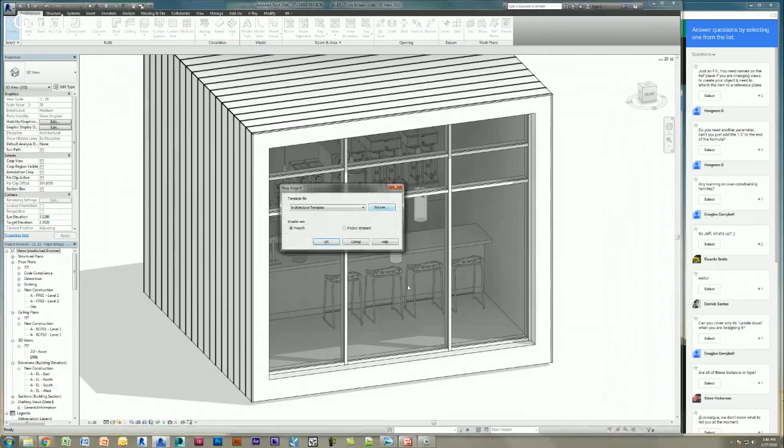While that's going, do you guys have any further questions? It looks like there's not many right now, which is good. What do we got? 344. Perfect.

Okay, so I'm going to quickly just place this light in a box. I'm going to draw some walls here. Maybe I'll draw a ceiling. Oops, not sketch. Automatic. Go to ceiling. Mad at me. That's okay.

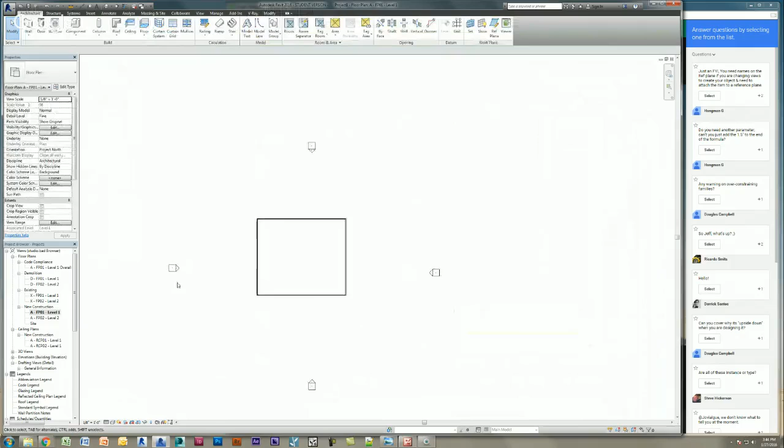I thought I had a question, but maybe not. Okay.

Okay, so there's my ceiling I placed. I'll load that fun light fixture in that we just created. Happy hour fixture. Final light. Okay. Load this into the new project and place it on a face.

Okay, David asked a question. Do you use the paint material often? If so, any cautions? I don't use it that often, especially in the family environment. There's a lot of funky things with painting materials in the family environment, because it's kind of like an instance parameter where you're kind of playing with voodoo there, like when you're painting walls and whatnot.

The biggest caution I have, whether you're in project or family environment, would be you can lose that paint without realizing it, and then you're kind of screwed. So here it works because you're hitting geometry. I guess the real way, if you didn't want to use paint, we could draw another cylinder inside that and give it the material, and then you can actually control it.

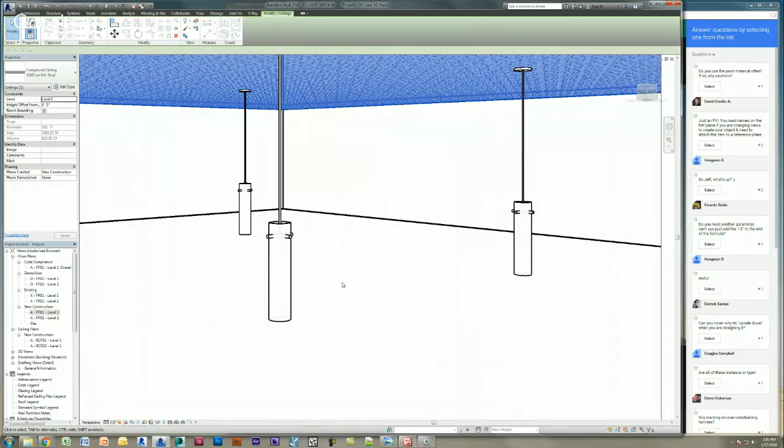So there are other ways to work with it, but I should probably draw a floor in this. But I guess my biggest caution is that it's kind of like an instance parameter where if you change or modify the element, sometimes you will lose it. So that's my biggest caution, especially when you're doing it on walls and stuff. But let's just go inside this view again, and then camera.

We got our light fixtures. I'm going to quickly set up a nice little medium rendering here. Let's go to low. Interior artificial only. And we'll do this. Okay, I'm going to quickly render.

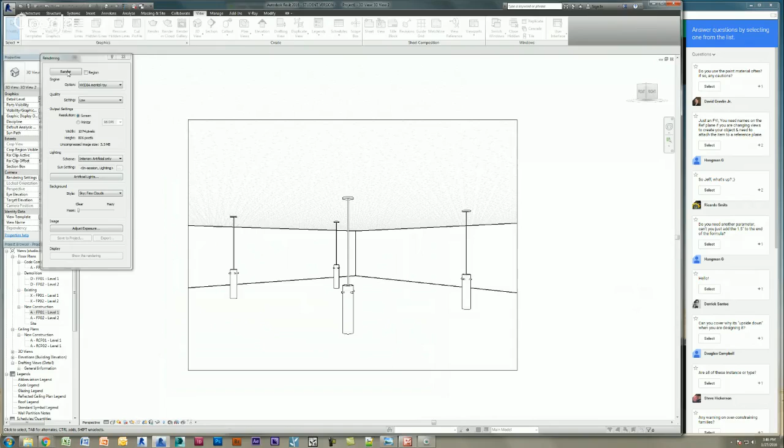So that was the tutorial I wanted to go over.

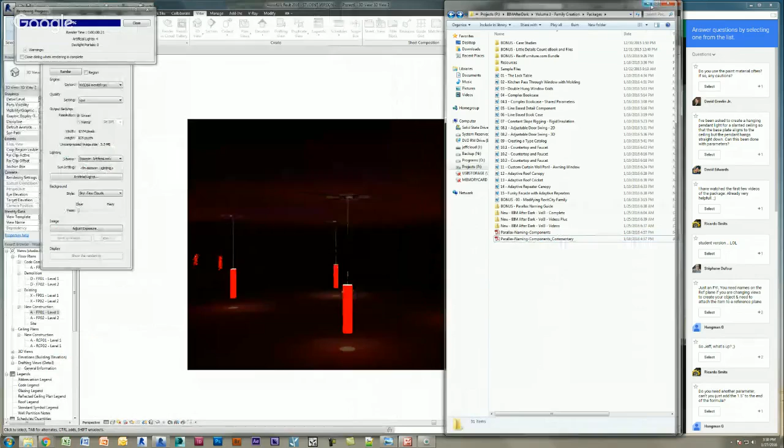So we've got our rendering done here. You can see how cool this looks.

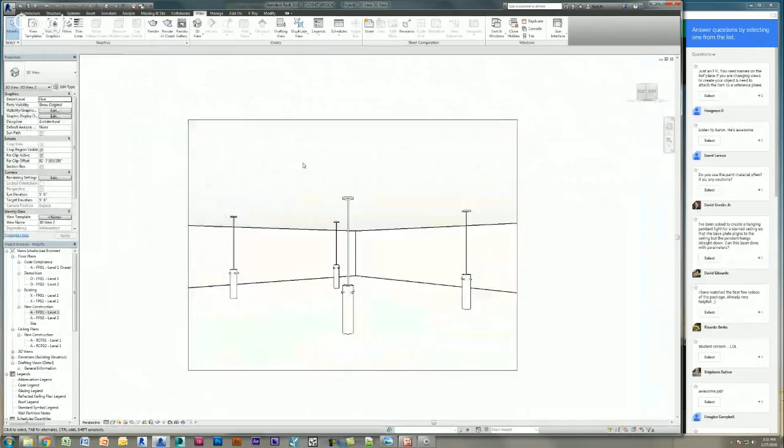Oh, the pendant. So David was trying to create pendants. I actually just got this email this week on a slanted ceiling, and he was asking how would I go about that. And honestly, whether it's face based or ceiling based, it's pretty much a workaround. So if I go back in this family, I'll slant this ceiling here. I know you're probably doing it on a roof or something, but I'm just going to slant the ceiling because we already have it modeled.

And I'm going to make it 8 feet on one side and click finish. Okay. Now, if I go back to my 3D view, which I don't know where it went. Here we go. 3D view 1. You can see all this stuff is slanted, right? Which we don't want. If I cut a section through it or turn on my section box here, it's probably the easiest way to see it.

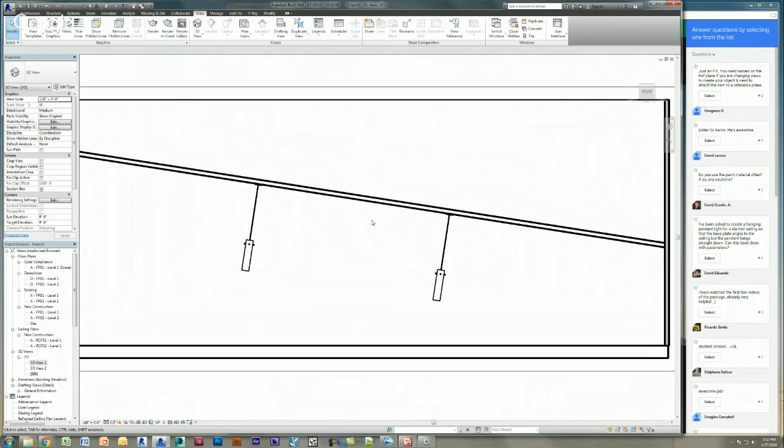Right? If I pull this back, there you go. That's not what you want, right? And whether you're using face-based or ceiling-based, you're probably going to run into something like that, which isn't fun, right? So the way I've gone around it, well, I guess there's a couple ways. You can, when you're placing a face-based family, if I click create similar, you can place it on a work plane, right? So you can set up a reference plane.

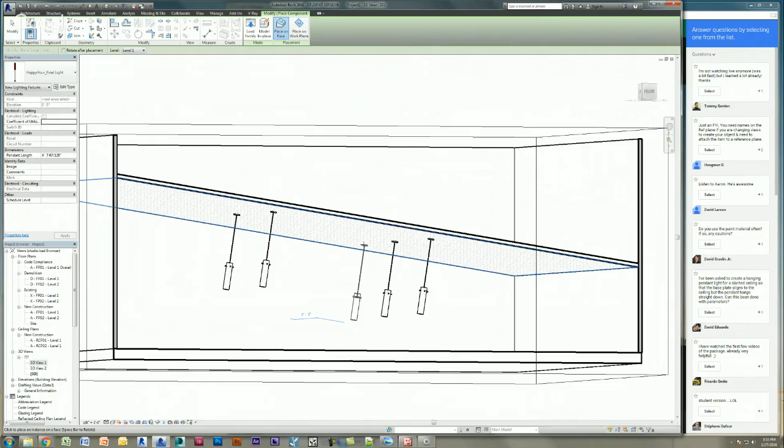So you'll notice you can actually place it on a work plane. So if you really wanted, you could set up a reference plane. So if I went into sections here, this is definitely where you want to name reference planes, but the problem would be that people can delete your reference plane. So if I type CS here, I say place on a work plane, I can pick this plane, go into my 3D view, and place it if it doesn't freak out.

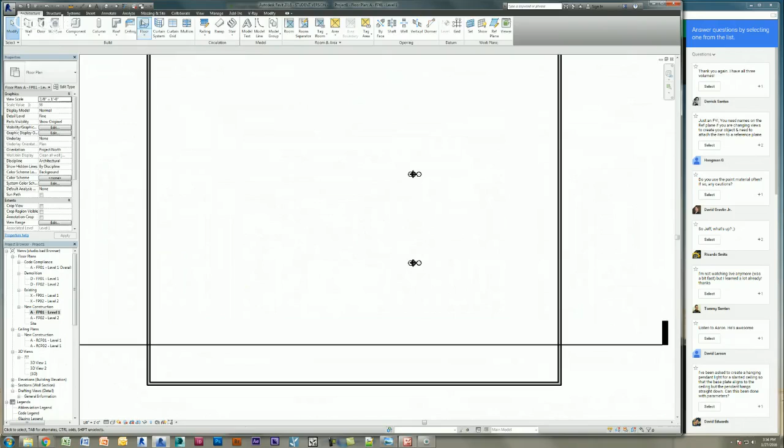Just freaked out. Honestly, the way I do it is I will typically place a ceiling or an object that will be the same size as my mount, and I will use that. I know it sounds crazy, but honestly, it seems to work the absolute best. So if I basically sketched a ceiling here, and I drew a circle, and I know my mount is 6 inches, I'll just draw that there. Go in 3D. So you can see I have this circle here. I'll apply my light to that circle. I guess it wasn't 6 inches. Now I can actually control it by this.

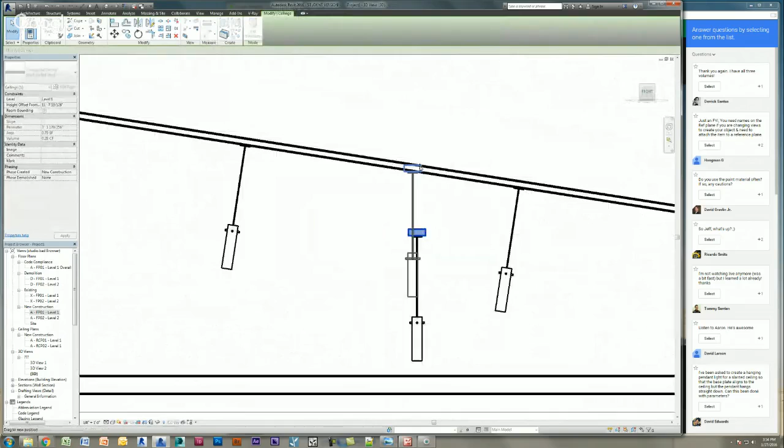So again, it's not the greatest way. If you're going to do that, you might not want to go face-based. You can go with a work plane. But now you can sort of bury this in your ceiling or your roof or your wall, or maybe that becomes your junction box or something like that. So there's other ways to go about it. Because we use face-based, that's one of the issues you're going to run into. And if you had another option, let me know. I'd love to know. You can see it's looking for vertical faces and faces, but it's also looking for work planes. So the option could be a work plane, right?

So if I said level 2 and click place, it's going out of zoom here. There we go. But now it's upside down, right? So there's a couple issues with that. But honestly, my biggest workaround, the way I've done it in the past, is I'd use a sacrificial element, maybe use it as a junction box or something like that to keep it straight.